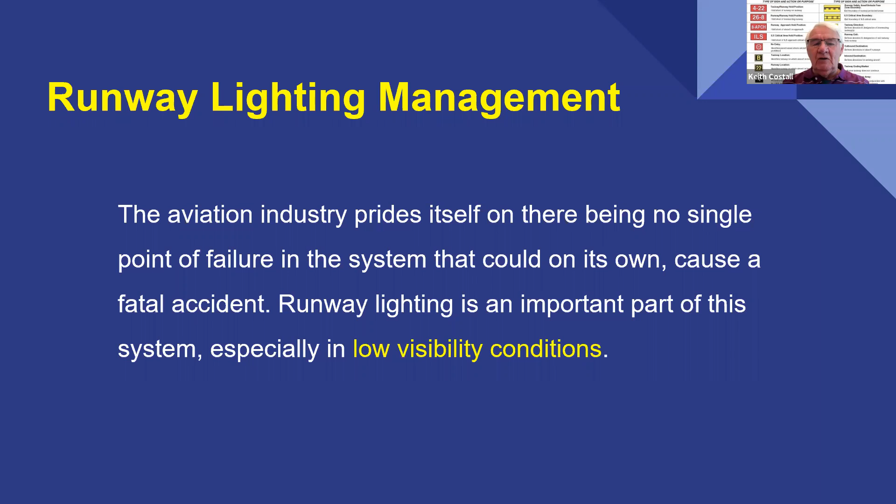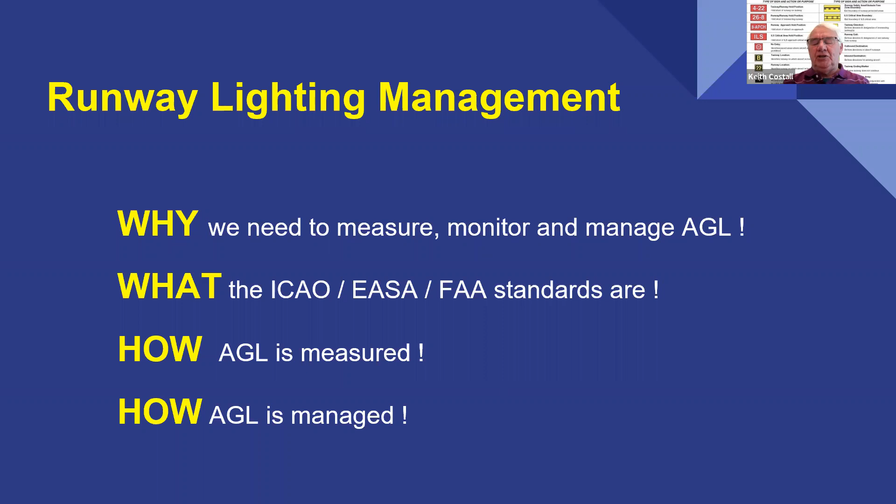So why do we need to measure, monitor and manage our airfield ground lighting? What does ICAO say? What does EASA say? Because we're physically in the geographical area of Europe, so EASA is the European Aviation authority, and we also take due consideration of the FAA, the American Federal Aviation Administration standards. So what are they? And how do we measure AGL in terms of demonstrating compliance?

And why do we measure in terms of compliance? We really do need to have a very clear and accurate understanding of the runway visual range. Now, you need to understand what runway visual range means. It doesn't mean how far can we see the terminal over the horizon or anything else. It's when the aircraft is on the runway, how far can we see the visual aids down the runway? That is runway visual range.

And there is equipment to measure that alongside the runway. Therefore, the decision to go to low visibility procedures, for example, is based upon RVR. And we in AGL provide the visual aids, the illuminated visual aids, to support that, so that we need clear and accurate information for safe operations.

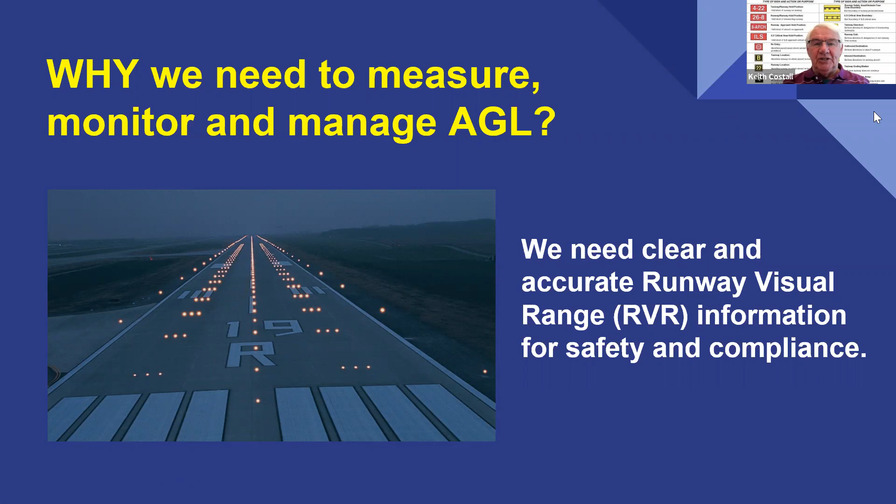Now, this is a little video which explains and shows, and here we see an approach.

The approach being a Calvert approach system. We've now getting close to the threshold, but when the low visibility, when the mist comes in, they seem to disappear. And then suddenly, we see, oh, we're at the runway. We've passed the threshold, and now we've gone through the lower than the mist level, and we're now down at the runway, and the lights will appear again.

And when we're talking about those lights, those standards associated with that light output is mandatory on us, according to the isocandela diagrams in the standards. So that's just a very brief clip of arriving, because what happens, especially in the mornings, in many airports, we get the haze, the morning mist.

Therefore, when we're above that mist, the pilot can see quite readily into the distance. But of course, the pilot has to come down through the mist to land on a runway. And so that band of mist means that the lighting, the runway itself, and hence the lighting, will slowly disappear from view and then arrive again.

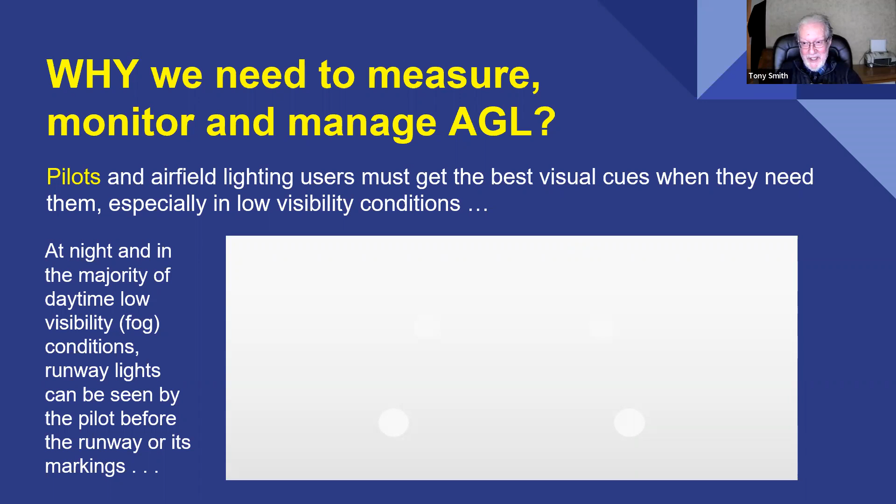He interpreted that as the fact that the nose of the aircraft was pitching up, and so he pushed and flew into the ground. Fortunately, there were no fatalities, except some horses that they got on board that died in the subsequent accident. But it was a wake-up call that we needed to look a bit more closely into the lighting design.

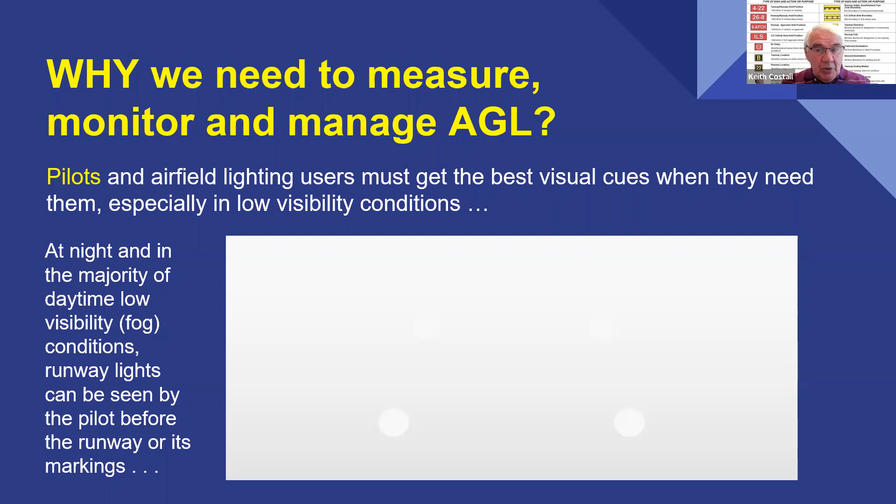So we've now moved on to this slide, and it's just like you might see a white area in the center, and the two little dots. The reality is, in low visibility conditions, that is what a pilot sees when looking for the lights which have disappeared into the fog. It's very, very difficult, because if we're coming into an approach, the approach lights are white. It is only when we get to the last 300 meters of the approach prior to the threshold that we have different colors - the red if you're in category 2 and 3 of the supplementary approach lights, and then the green of the threshold lights. It's just a little explanation to say it's not always as straight and clear, especially in lower visibility conditions.

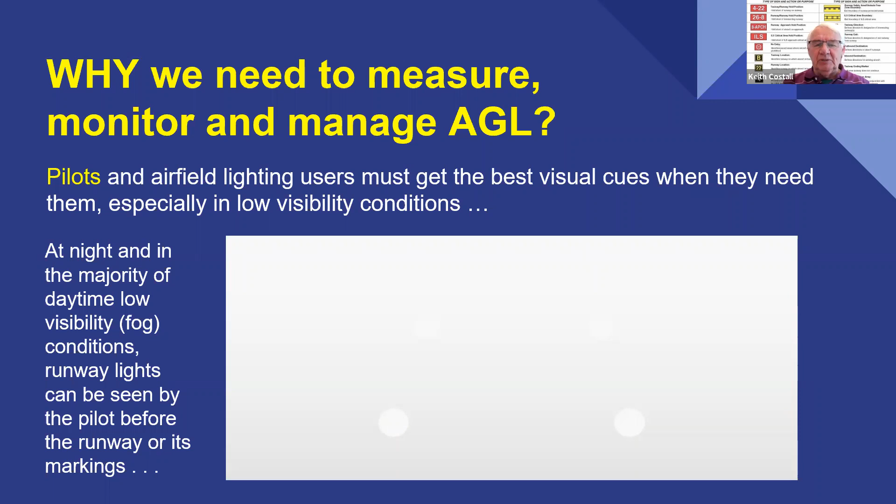So why do we need to measure and monitor AGL and manage AGL? Well, the reality is the airport operator, the aerodrome operator, has a legal responsibility to ensure that all facilities are acceptable and compliant for safe aircraft operations. And therefore, from a commercial viewpoint, in addition to the legal viewpoint, obviously they want to maximize the capability - more aircraft landing, more aircraft taking off, more passengers. It means money at the end of the day. So it's both a commercial advantage and a legal responsibility to do so. Airlines similarly want to minimize delays, diversions, etc.

And we all know what happens when an aircraft gets diverted for any reason - the aircraft's in the wrong place, the passengers have to be relocated potentially by other means, and then the pilots and aircrew are out of flying hours, etc. So there's a lot of issues associated if we do not have a compliant system, whatever the system is - but obviously we're talking about airfield ground lighting, or aeronautical ground lighting, which is the correct formal name for AGL. And of course, regulators and airport authorities are licensing aerodromes, and we have to ensure our systems meet those licensing requirements in accordance with the regulations. So that is why.

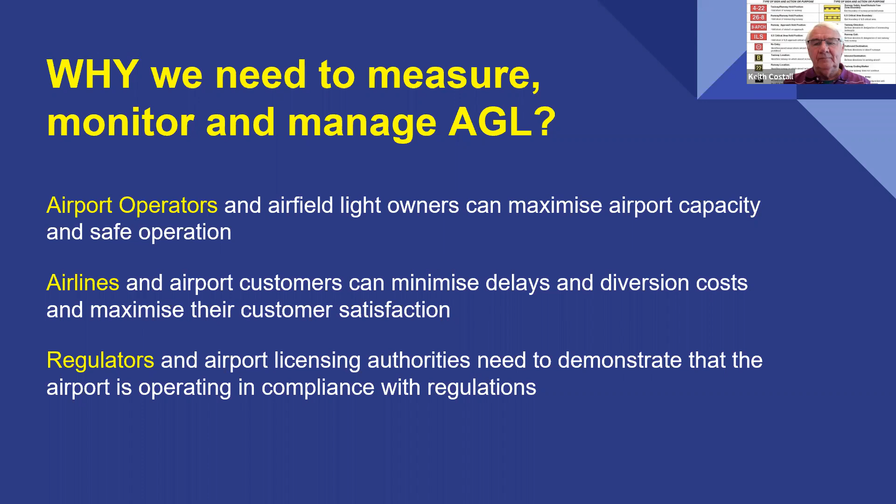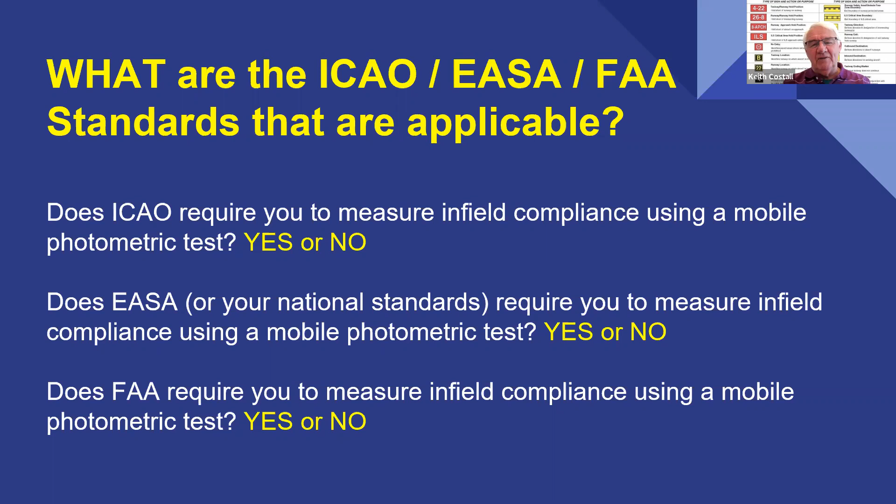So what are the standards? Well, I've mentioned ICAO, EASA, in previous webinars, and the FAA in previous webinars. And what are those standards? Do ICAO, EASA, the FAA, or your regional or national standards, like CASA in Australia, actually require you to measure the AGL for compliance? Answer it for yourself - do you think where you are in the world, you have to demonstrate compliance, and if so, how do you do it? Remember, one of the statements we've made in the past - you cannot manage what you do not measure. So if you're demonstrating compliance, you will need to measure the light output in the installed situation in the field. So ask yourselves these questions: are you required to measure in-field compliance using a photometric test? Next slide please, Robert - we'll talk about that a little later.

So what are those standards? Well, clearly the international standard in ICAO is Annex 14, and it's the latest edition - currently edition 8, including the latest amendments. Bear in mind that periodically the editions are released. So we're currently in Annex 14, Volume 1, which is the aerodromes. There is a Volume 2 for heliports, but we are dealing with aerodromes. So it's currently at edition 8. You need to ensure - you have to buy this document from ICAO, it's a purchased document.

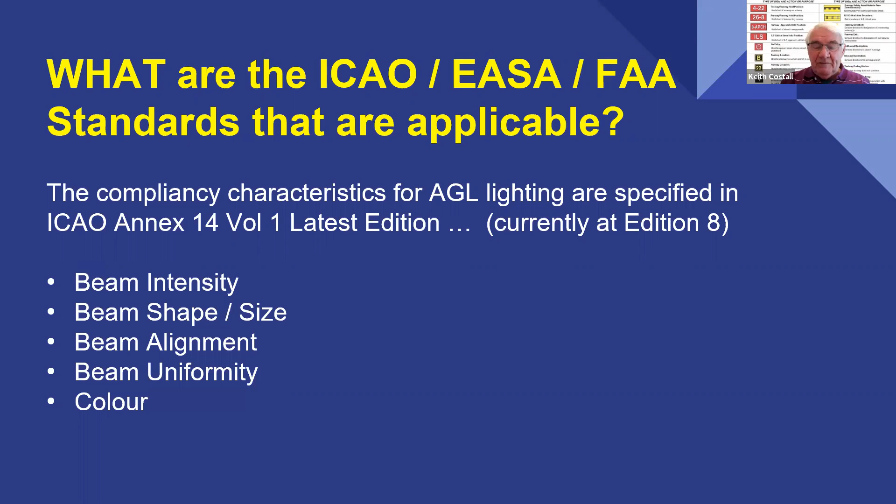But what we're looking at in AGL is beam intensity - the shape and the size of the beam, the alignment of the beam, which direction it's pointing at, and the uniformity associated with that beam, and of course the color of the lights themselves. So we use different colors for different functions, and when we're looking at that intensity and those standards, in Annex 14 there are a set of iso-candela diagrams. Interestingly, some of them look circular and some of them look rectangular, and I often get asked - well, why is that?

Well, the reality is, from our perspective, from a maintenance engineering, operational maintenance engineering perspective, it really does give us an indication of which are runway related lights and which are taxiway related lights. So the circular looking ones are for runway related lights, and the rectangular looking ones are for taxiway related lights.

And it gives us a pretty quick glance, but of course there is a set of requirements in the iso-candela diagram, which shows us the intensity in terms of the minimum average intensity. And from an in-field viewpoint, we're only interested in the inner ellipse, only for operations in the field.

And also under the isocandela diagrams, there's always a set of notes, and also a set of collective notes at the end of each appendix. When we're looking at the notes, if there is to be a toe-in, an angular, horizontal angular direction - for example, touchdown zone lights are toed in towards the center line of the runway - that toe-in will be in the notes. It's not shown in the iso-candela diagram itself; if there is a toe-in, it will be in the notes. Just to be sure that you understand that.

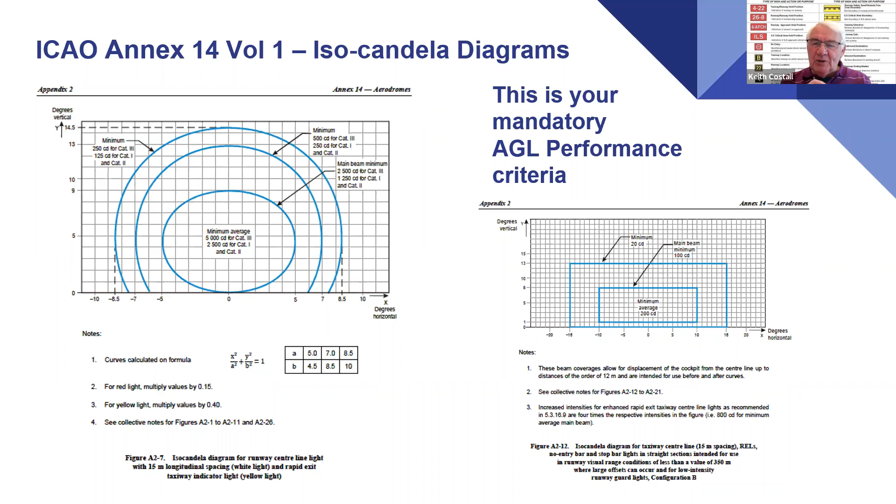Now, iso-candela diagrams is the standard that we refer to when we do photometric compliance testing. And we've got a nice little explanation here. We mentioned earlier when we were looking at a little video, and we look at when light output can disappear.

Because of runway visual range considerations in terms of fog, etc. But when we look at an individual light, we say what actually causes this? Well, one of the main things is like rubber deposits in that touchdown zone area, as an example, dirt. If you look at the inner ellipse which I'm showing here, there's a lot of crossover points, and those crossover points are 1 degree crossover points.

And we've got to maintain a mean average across all those crossover points. So how we measure is that you measure the light intensity at each crossover point, add them all up, and then divide by the number of crossover points to give us the mean average. And if we lose, for example, 1 degree at the bottom of an ellipse, and if we look here, you will see that you can count - 1, 2, 3, 4, 5, 6, 7, 8 - and if we look at all of them, there's 52.

Now, if we lose 8 measurement points because it's dirty, out of 52, we are losing quite a dramatic percentage of light output. And if we lose 2 degrees at the bottom and we lose 17 points, we are now in an area where we've got a serious problem. So how can you measure for that? The human eye will say, oh, that light looks a little bit dimmer than that light alongside it, but you can only quantify it by doing a measurement.

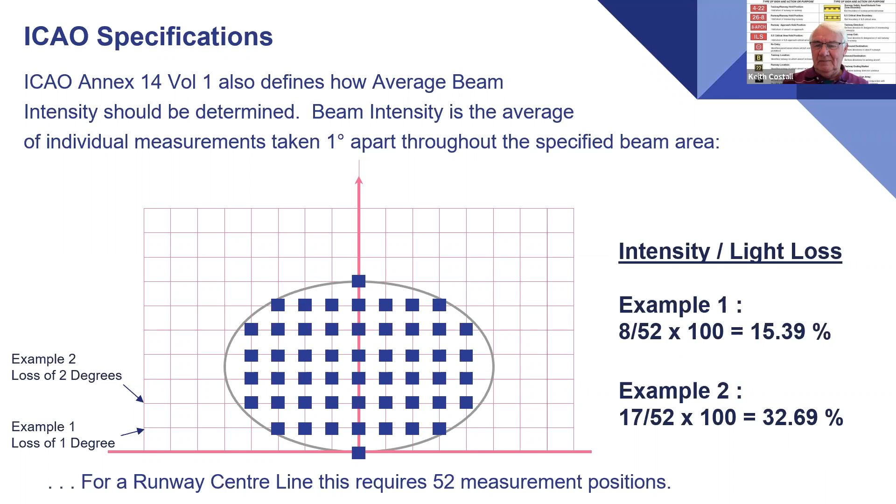And this is a good example. So what we do is, when we're looking at all our different systems, we measure light intensity by using a percentage. And we always say that at step 5 - internationally, and some nations have more than 5 steps - when it's at maximum intensity, that is 6.6 amps electrically feeding the light fixture, we call that 100%.

So the iso-candela diagram is based on 100%. So 100% of an approach light, which is deemed to give us 20,000 candela, is 100%. 100% of a runway edge light, which is deemed to give us 10,000 candela, is 100%. So we base everything around the 100%.

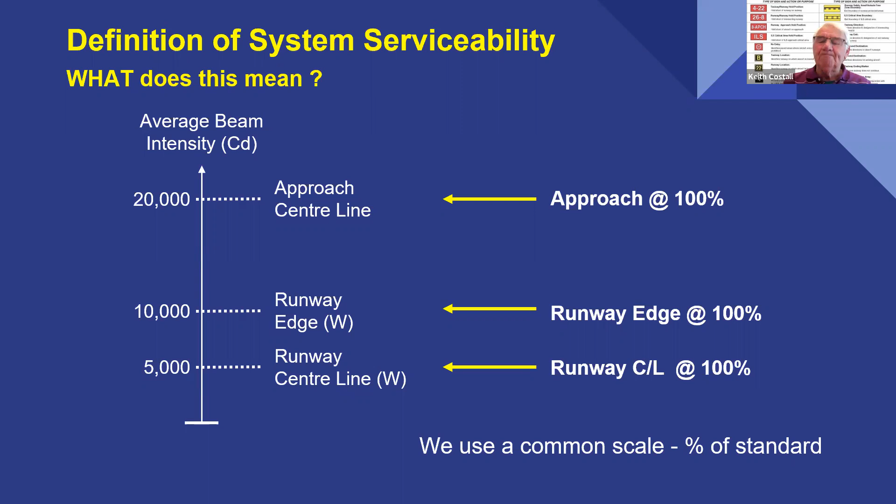And therefore, this is a nice little slide which explains where we go into the serviceable and then down into the unserviceable range. ICAO defines that in Annex 14 and the supporting documents. Then when the light intensity of an individual light drops to 50% of the design criteria - and the design criteria we know is the iso-candela diagram at 100% - so when it falls to 50% of 100%, then it is deemed to be unserviceable as an individual light fixture.

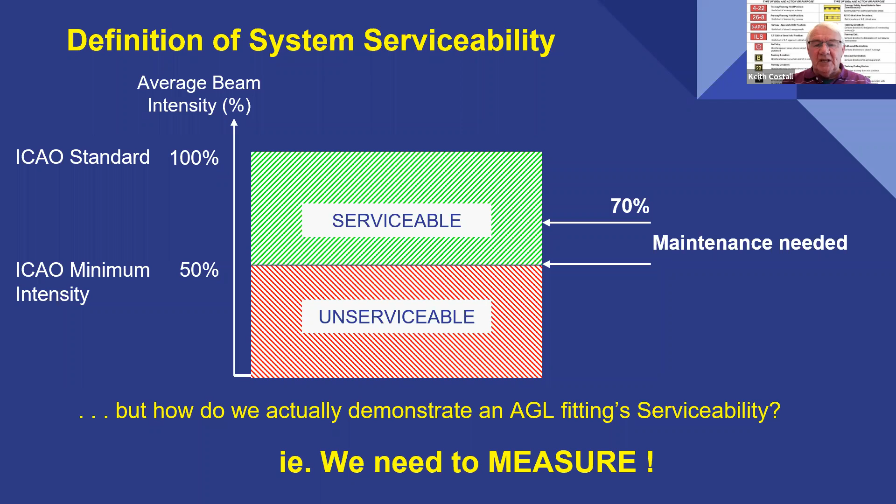And the guidance in the service manuals, the ICAO service manuals, gives us maintenance guidelines. They give us guidance to say that when the light output falls from 100%, which is the design criteria, to 70%, that light then should be deemed to need maintenance. Now you can decide that, but the guidance from ICAO says 70%. There are some national authorities which have a slightly different percentage for that maintenance, but you need to decide that. So there's the guidance. Let us now go on to the next slide, Robert.

So what are those standards, and do you use photometric? Now I asked that question earlier, a little earlier.

Well, the answer is in all aspects, it's a yes in ICAO, it's a yes in EASA or your national standard, and it's a yes for the FAA.

Most specifically, I'll bring to your attention that in ICAO, during the pandemic, they reissued a document, 9981. The ICAO document 9981 actually defines the criteria associated with safety and compliance.

But when we're looking at EASA, in 2021, during the pandemic, they issued the guidance on certification specifications. That document was released around June 2021 during the pandemic. So again, there is a yes for EASA.

And when we come into the FAA, for those airports under FAA guidance anywhere in the world, if you're operating under FAA regulations, then for airports funded under Part 139, their 139 criteria makes it mandatory to do a photometric test. So in all three aspects, it's a yes and a yes and a yes.

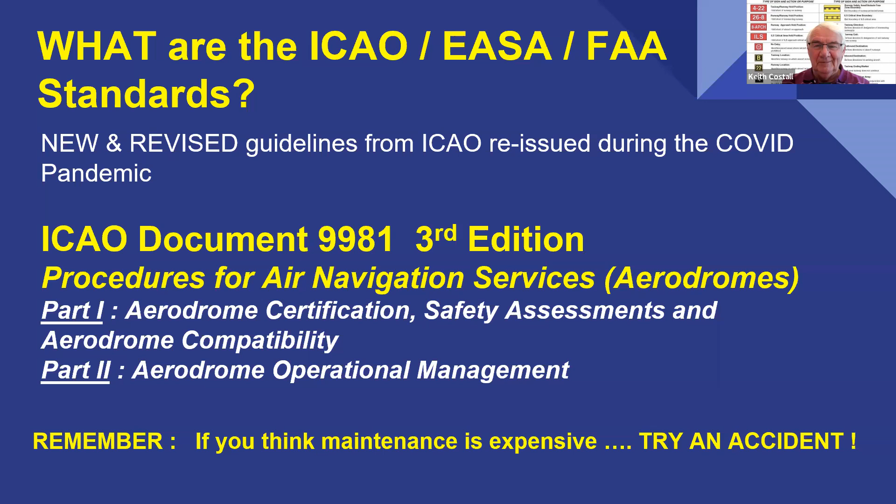So how do we measure it? Well, the regulations are pretty clear, and now 9981 reinforces that. The third edition reinforces that, and I've extracted just two little statements about the visual aids lights. Out of 9981, it says lights shall have the required colors and intensity levels, and they shall comply with their serviceability levels or the maintenance objectives.

We know what those colors and intensity levels are, but you've got to measure it. Do they comply with the serviceability levels and maintenance objectives? You've got to measure it and take suitable records.

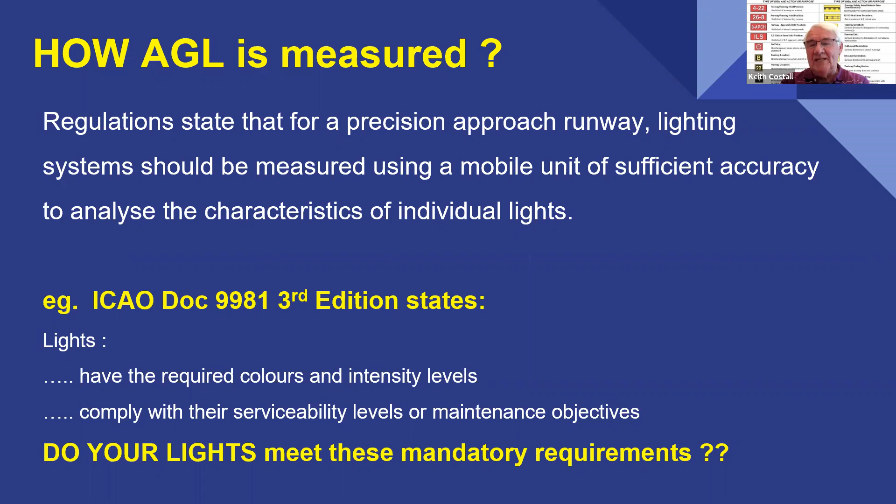So I'm saying to you guys out there, do your lights meet these mandatory requirements? And can you demonstrate it to the regulator? Would you be willing to go into a court of law in the event of an incident or accident, where there's a legal investigation, and say yes, my lights meet the standards, and I can demonstrate it using the tools that are available?

And what tools are available? There are tools. Photometric testing. There's photometric testing in the field, and there's photometric testing in the workshop capability.

You can demonstrate it. Here is an example from the aerodrome design manual, part 4, on visual aids, chapter 17, with a nice picture of a typical photometric measuring tool. It just happens to be MARMS. Why MARMS? Because it's accurate, reliable, repeatable, easy to use, and quick to use. So it meets the needs of maintenance teams.

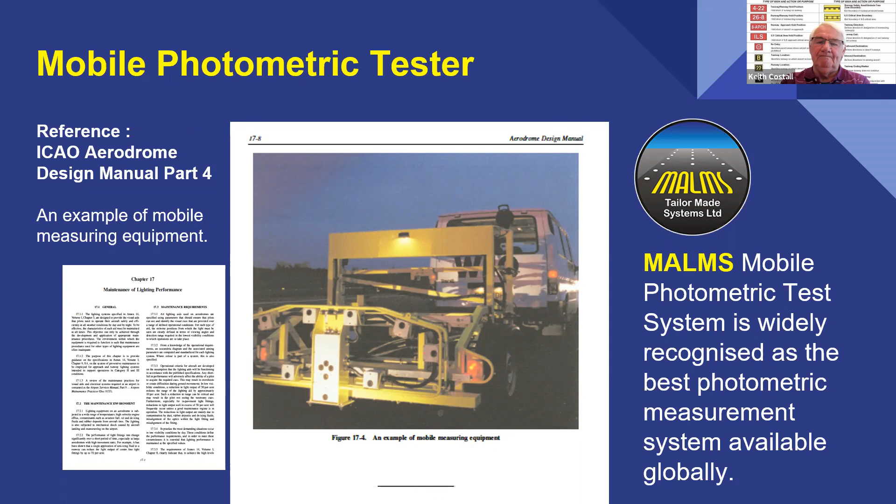And how do we demonstrate? Well, remember, we talked about 100%, we talked about 70% for maintenance, and we talked about 50% for unserviceability of an individual light. So we use green, blue, and red in our bar chart.

In the photometric bar chart, you'll see a line. Individual lights that are above 70% are shown as green. Those with a light intensity between 50 and 70% are shown as blue. And those below that, which are unserviceable, are shown as red, with a clear 50% line.

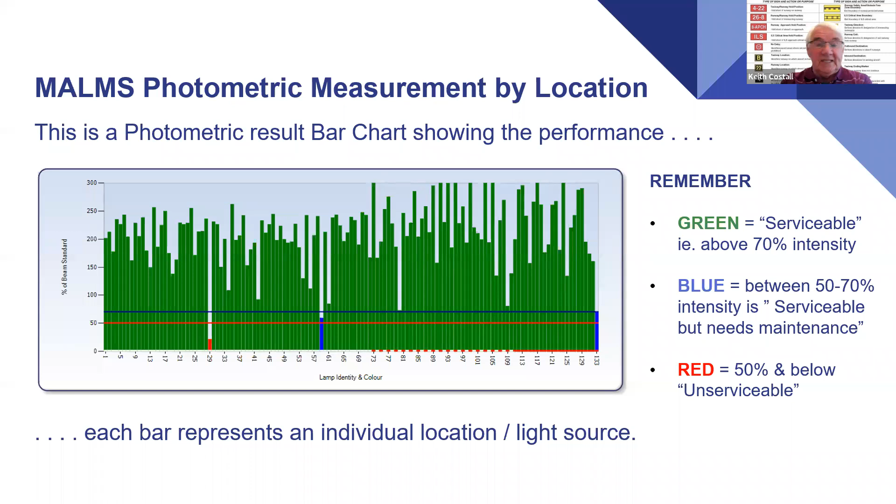I've talked so far about individual lights, but there's also the criteria for when we put all these lights together in a system, and there are guidelines from ICAO associated with system serviceability.

We still use 100% as the baseline. If we look at a Category 2 or Category 3 runway, at least 95% of the lights shall be deemed serviceable, and no two adjacent lights shall be unserviceable in a Category 2-3 operation. But for Category 1, where visibility is further, beyond 550 meters RVR, then it's 85%.

Now, when we look at individual systems, those percentages for Category 2 and 3 are slightly different, some are 90%, but generally speaking, in a maintenance team, we stick to 95% so there's no confusion. And that's our target when we're managing maintenance.

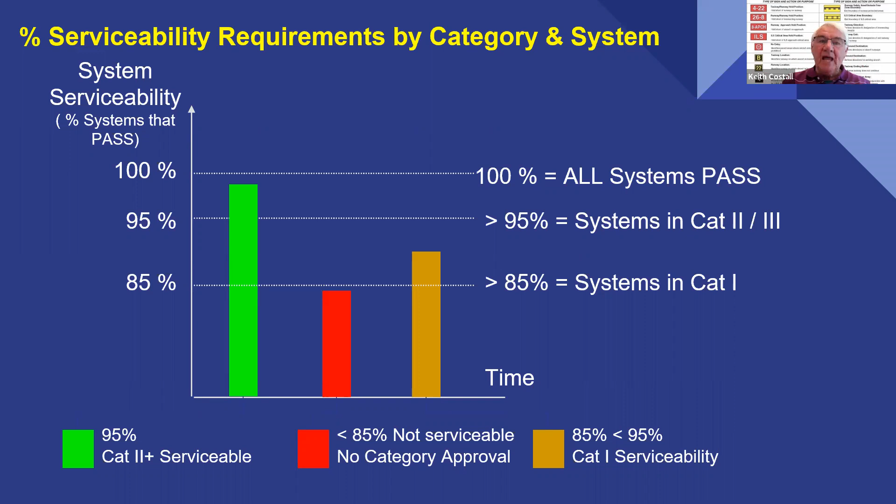So where do we start? We've got to measure the light, but how often, how frequent? That question keeps coming up because ICAO said in the guidance, at least a minimum of 2 times a year. But how can you have only 2 times a year right across the world at different intensity, traffic density levels, and different geographical and atmospheric conditions? It's impossible to have one standard. So you have to start somewhere. This slide gives a guideline of where to start when determining your periodicity of checking.

For runway edge lights, for Cat 1, let's start at a 12-week cycle. If there's a center line with a Category 1 runway - it's not mandated to have one, but if there is - then probably a 4-week cycle of photometric testing. When visibility comes down, we want to be more stringent, so for Cat 2-3 edge lights, we'd probably test every month. Then we look at the records and decide periodicity of inspection according to those records.

There are other factors too, like is it 3 aircraft a day, or 3 aircraft an hour, or 30 aircraft an hour? Traffic density has a factor. Also, how long have these light fixtures been in - are they tungsten or LED? This element also has a factor. So we just give guidelines of where to start.

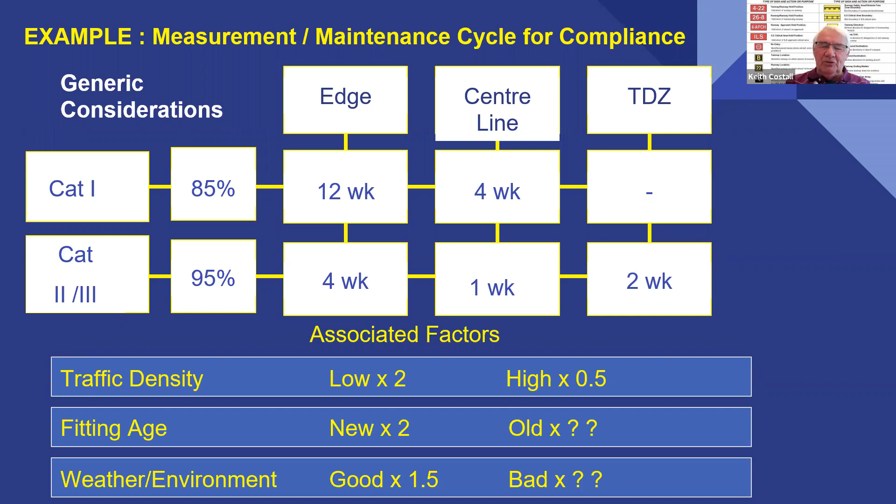So what are the factors which deteriorate light output? Electrical factors - not getting the correct current. Optical factors - is it a tungsten halogen or an LED, for example? And the fixture itself inside - is it secure?

There's the civil elements associated with where we put inset lights or in-pavement lights. We have to put them into a base unit, glued into the pavement, straight and level. But what if the pavement moves because of rutting? If you go on a highway, a 2 or 3 lane highway, the inner lane is always a little less smooth than the outer lanes - because the heavy vehicles, the lorries, go on the inner lane, and eventually you get the track called rutting. We have the same concept on a runway pavement, especially in touchdown zone areas or on rapid exits, for example. So we get civil elements.

We also get mechanical elements - is the light fixture fixed down securely into the base unit, etc. These are factors which affect performance. Now, interestingly, when you do a photometric test using a MALMS system, there is some indication in the way the results are presented which can give you an indication of which factors are affecting the light output. That's an important aspect to remember - it gives you some indications, you still have to understand it, but it gives indications.

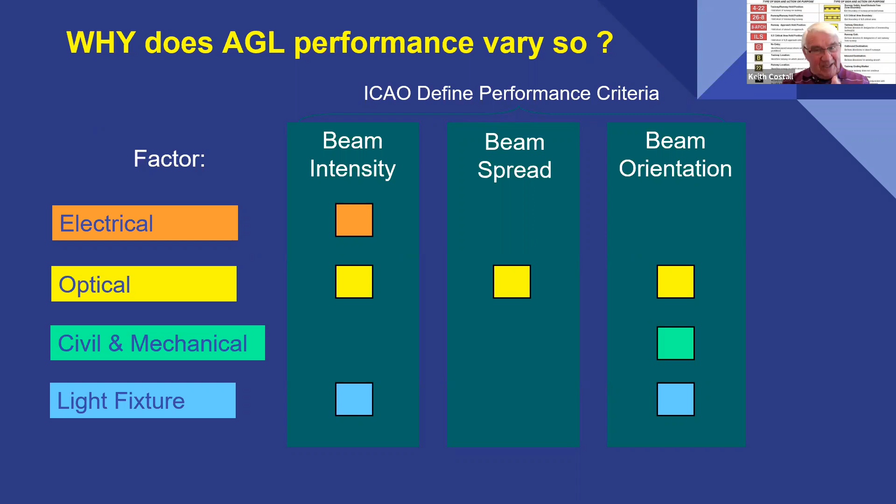So how do we manage it? Well, we manage it in accordance with the standards, using a photometric test, taking the records, looking at the records, etc.

So let's not forget, there are civil elements to be considered, mechanical elements, and electrical elements to be considered if we do not get the correct photometric output. Today we're talking about photometrics - we're not talking about the civil, mechanical, and electrical side. But if anyone wants training or a webinar on these subjects, then we can do so.

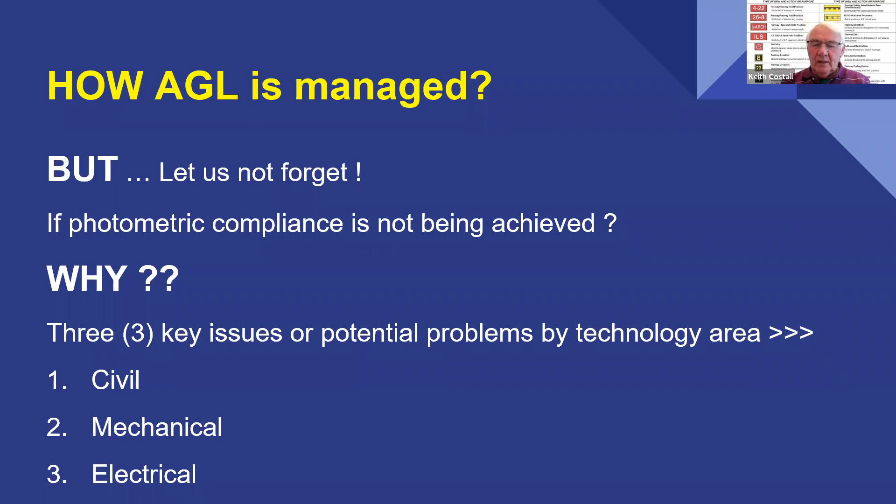I think it's my turn now, Keith. I think now we actually get into the nitty-gritty of management of the assets. You've left me one minute to do my slides.

Thank you, Keith. So we're talking about management of airside assets, asset management. Key to asset management of your AGL is good installation, as Keith said earlier - electrical installation, optical installation, civil, mechanical, and of course the light fixture itself. If it's not serviceable, if it's not compliant to start off with, you can't maintain it to a serviceable level. So it's vital that as part of any new installation, either a refurbishment or a new runway altogether, that you get measurements taken, compliance, photometric testing, basically, to ensure the system you have acquired, purchased, or installed is compliant to start off with.

If you have that, which you should have, you then need the spare parts and tools, including measurement equipment and an asset management system. You're measuring, there are airports with tens of thousands of assets out there. You can't measure them on bits of paper, you can't manage them on bits of paper.

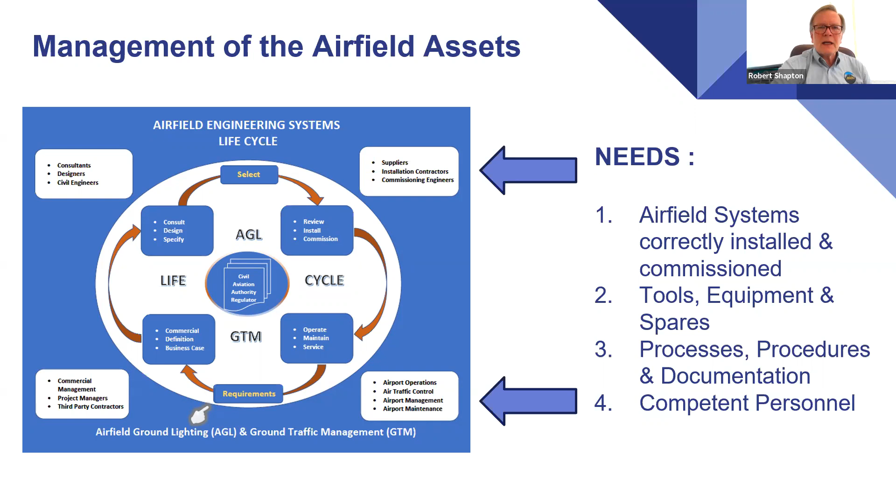You need an asset management tool to manage those assets properly and efficiently, to achieve compliance and efficient operation. You need good processes and procedures—without them, you can't manage your assets either. But the vital bit that glues it all together is you: competent, well-trained personnel. You need the tools and good processes, but at the end of the day, it's people that matter when it comes to achieving and managing these systems.

An example of that would be MALMS engineer system and dashboard. All assets have the same characteristics: they have to be purchased and installed, commissioned, managed and maintained, and at the end of life, decommissioned and replaced.

AGL, however, have to be compliant at all times. It's not one day of the year when civil aviation come—it's at all times, because when called upon, particularly in times of low visibility, those assets have to work to achieve the benefits we saw earlier, and fundamentally make sure pilots have the visual cues they need to land safely and take off safely.

The costs—it's also vital that the cost of managing your AGL throughout their life should be minimized. Cost is unfortunately something we have to consider at all times, and I think we all suffer with it, because particularly with COVID there have been a lot of cutbacks, making our lives increasingly difficult because a lot of knowledge and experience has been lost to our airports.

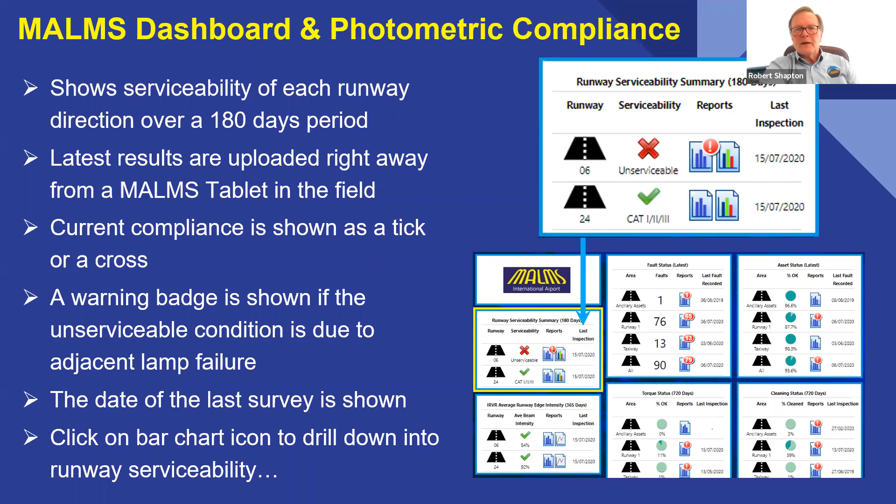The dashboard shows high-level measurements, the entry-level dashboard, which you can configure yourself when using the system. It shows the four measurements of the key areas, including runway serviceability. A cross or exclamation mark indicates action is required or overdue. A user can drill down to each individual AGL for analysis and action by runway, looking through to service, the centerline, TDZ, edge, threshold or end, and then to individual bar charts representing lights, to an isocandela for that particular light or fixture.

Here's an example of a bar chart. Each bar represents an individual light fixture. The black ones are blanking plates. A green bar is serviceable, and blue represents a light requiring maintenance.

As Keith said, according to ICAO, once a light goes below 70% of its required output, it should be identified and maintenance carried out. It should never reach red, because that is unserviceable—effectively not working. You can see there are some red lights on this bar chart. As you know, the rule of thumb would be 95% for Cat 2/3 and 85% for Cat 1 acceptable. But in this case, you can see there is adjacent lamp failure.

So we have two lights that are unserviceable next to each other. This means the pattern, as the pilot would see it, of the runway lights—bearing in mind he won't see very far in low visibility conditions—the pattern is destroyed, and therefore the runway lighting system is deemed unserviceable.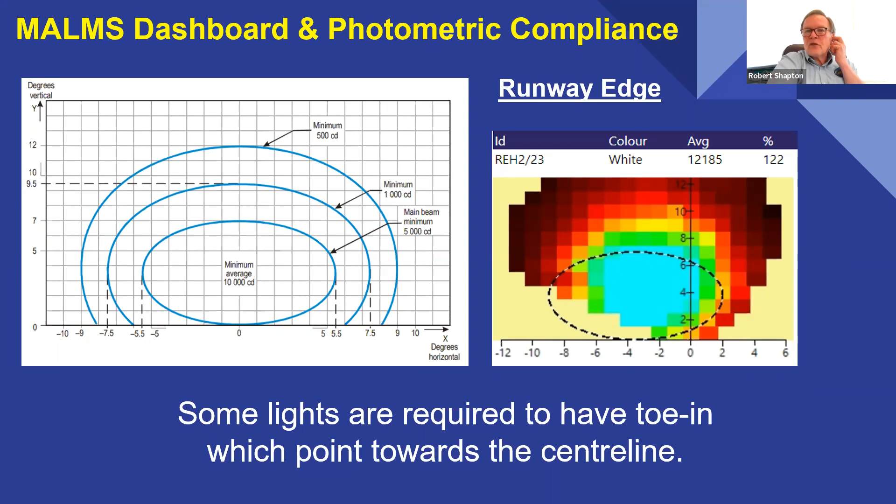This is an example of a report that shows a measurement. The top two lights here are showing each side. This is the light that's just been measured, with the other side of the light here. One side is unserviceable at 49%, the other side of that light is 71%.

Typically, this would represent... this would look to me, if you look at the previous measurement. This measurement was taken on the 16th of July, previous measurement 14th of April. You can see this light appears to have deteriorated over that time. It could just be dirt accumulating, or more likely on a halogen installation, the filament of the lamp is deteriorating and that lamp needs replacing.

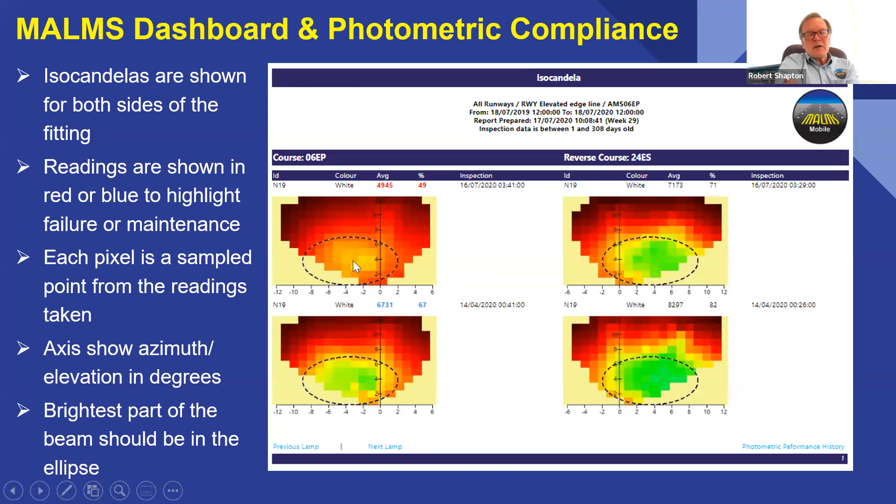On the other side of the light though, the performance is also deteriorating, but it's not as bad. Typically it will be a combination of dirt, particularly you will get one side of the lamp, in the prevailing wind direction or takeoff direction, which will suffer more damage to the lens than the other. So you will often see one side of the light better than the other.

Touchdown zone lights are an example of lights, like the runway edge lights, that need to be toed in. You will see they're unidirectional lights. These can either be a straight fitting in a toed can, or a toed fitting in a straight can. We often see issues where toed fittings are used and put in on the wrong side of the runway. This is easily identified on a MALMS course bar chart because the ellipse will not be at the same place as the brightest part of the beam.

Here's an example of a course bar chart where you can see the beam is in a significantly different place from the ellipse. On the top diagram, you can see the beam is probably a little higher than it should be, but it is pointing centrally. On the bottom isocandela, you can see the beam is high and to the left-hand side. This is, by the way, viewed looking from the inside of the light, looking out.

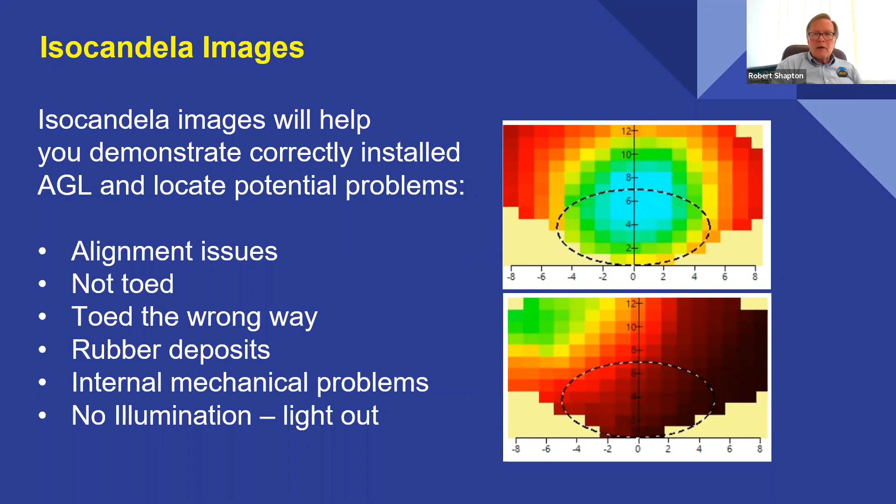Reasons for problems you will identify from an isocandela diagram include alignment issues, such as this - the fixture is not toed where it should be, it could be toed the wrong way completely. You will see rubber deposits reflected by dark patches on the beam. There could also be problems in the internal mechanism when the lights are put together, where the internal lamp components are assembled incorrectly. There are even cases where the light is completely out, where the isocandela diagram comes out black.

This is another example of reports to assist people maintaining the runway, where you get the course bar chart, and this report shows the map of the light. You can see the third light from the end is completely unserviceable - well, it's on both sides actually, but this course bar chart represents one side. You can see on the map which end of the runway to go to, to avoid any confusion.

Now, I know in the past I've seen maintenance taking place on the wrong light. It's important the reports clearly identify where you are. You can of course use, with our system, the tablet to give you directions to an individual fault. But if you're going to go out on the runway without a tablet, you can use paper reports such as this.

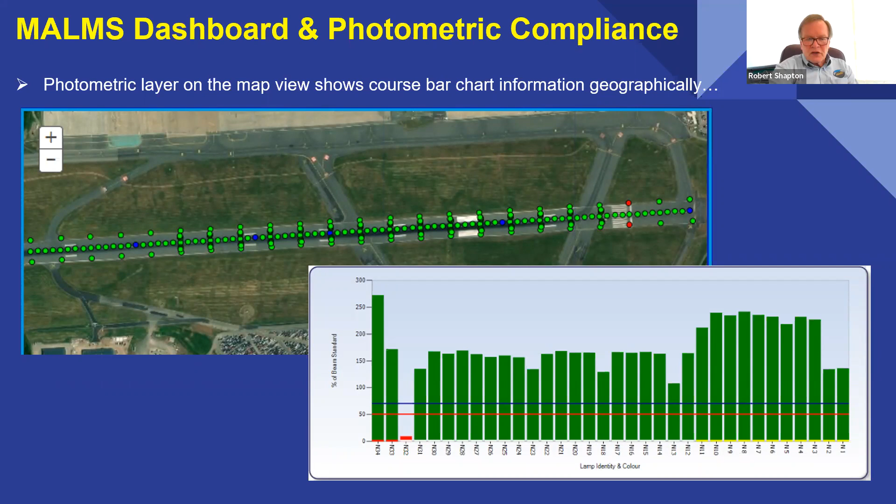Then we come to the runway service, the runway measurement charts. This one shows the number of assets that are at fault or unserviceable in an area, and the number of faults in an area. You can get more than one fault per asset - for example, you could have a photometric fault and a torque fault, so that accounts for the difference.

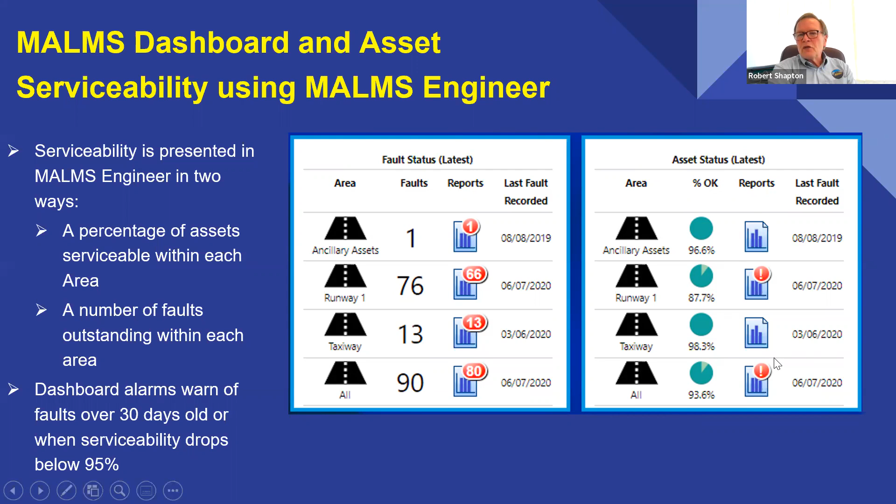You can also, in a modern asset management system, set a time limit for fixing faults, so that you will know if those faults are actually being fixed in the service level time specified for it. If they're not, you will get a shriek mark here to indicate there's a problem, and if you click on that, it will take you through to the detail of the individual asset, where you can see what the problem is.

MALMS can also be used to identify all the current faults on the airfield from various sources - not just the photometric faults we've been looking at earlier, but also faults imported from the control system, from visual inspections. They can all be reported onto the airfield. Also for other assets, you can see the PAPIs marked on there. You can even, using a modern asset management system, mark out the civils layers.

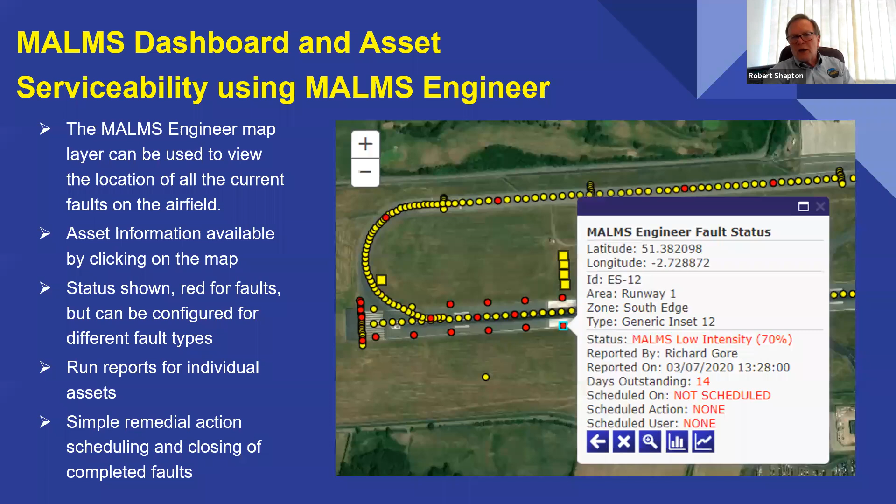But if you click on any one of those faults, you will get a fault status report showing you, for the asset, what the problem is. You can then click on one of those reports at the bottom to get the bar chart, the history, the isocandela reports, and any other information you need to identify fixes for that problem, for that light.

And then finally, there's the asset hotspot report, where you can select over a period of time the faults for an area, and you can see according to how red the light is, the red indicator, to show you where there have been multiple faults and how many. So in this particular instance, you can see on the center line here, where, as you might expect, by where the rapid exit is, there have been more reports on these lights than the lights after the rapid exit area. The redness will indicate the number of faults there, and you can click on them to identify the relevant information to assist with your asset maintenance.

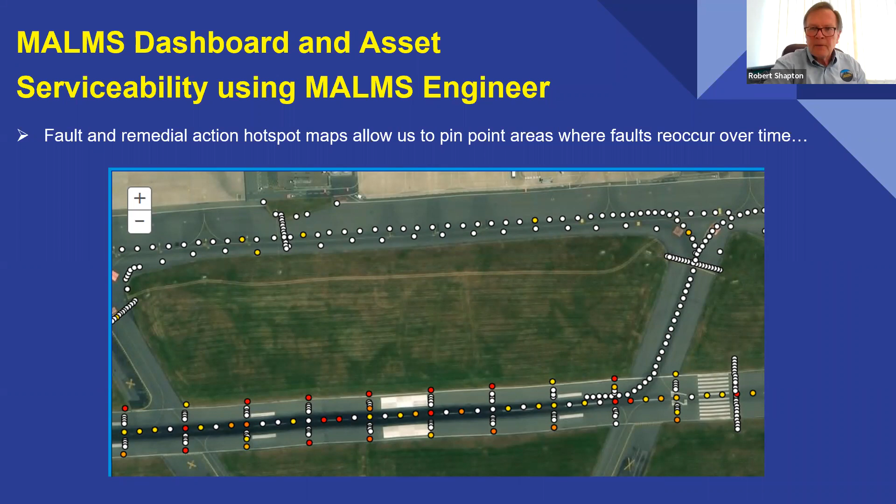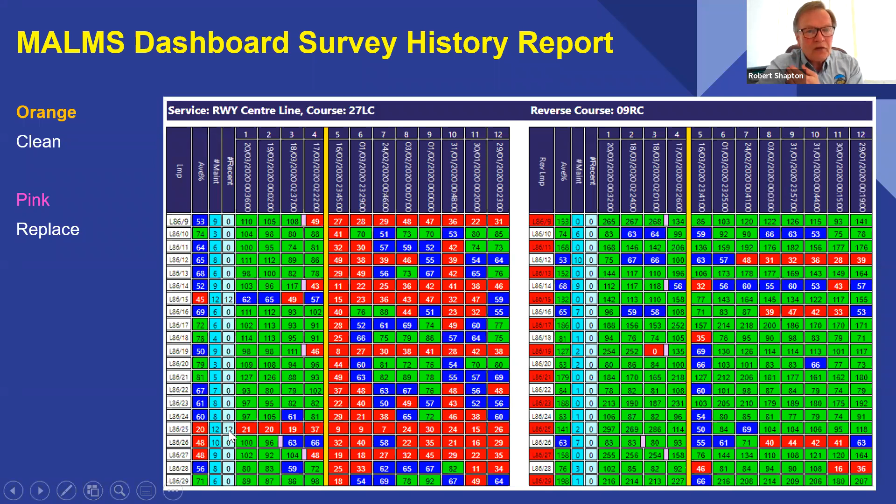And then we come on to the maintenance philosophy that we employ in TMS, and that's the MALMS differential maintenance. It's based on measurements and standards. You first of all measure to collect accurate, reliable and timely performance data.

You'd use a MALMS photometric system, photo bench, to test in the workshop to make sure you don't put any bad lights on your runway. You would have a MALMS sign and Papi tester for your signs and your Papis, and a MALMS apron and stand tester for your apron and stand lighting measurement, and of course the asset management tool to record and hold all those results and present it in the dashboard.

You then perform maintenance based on the measurements you've taken, the work being scheduled and targeted when, where and what as required. If it isn't broken, you don't fix it. Runway access is at a premium, as we all know, so that's absolutely core to our philosophy. And you use tools such as the MALMS airfield torque wrench, MALMS cleaner, a MALMS rapid serviceability tool, and MALMS engineer again to schedule and manage your maintenance and to conduct your planned preventative maintenance actions.

And then finally, you monitor the results of those and the effectiveness of your maintenance work using the MALMS dashboard. You measure and check your airfield lighting serviceability for compliance, your torque status, make sure everything has been torqued at the required service interval. You would look at your insulation resistance statistics to make sure you don't have any circuit issues and use the tools if required to address those issues.

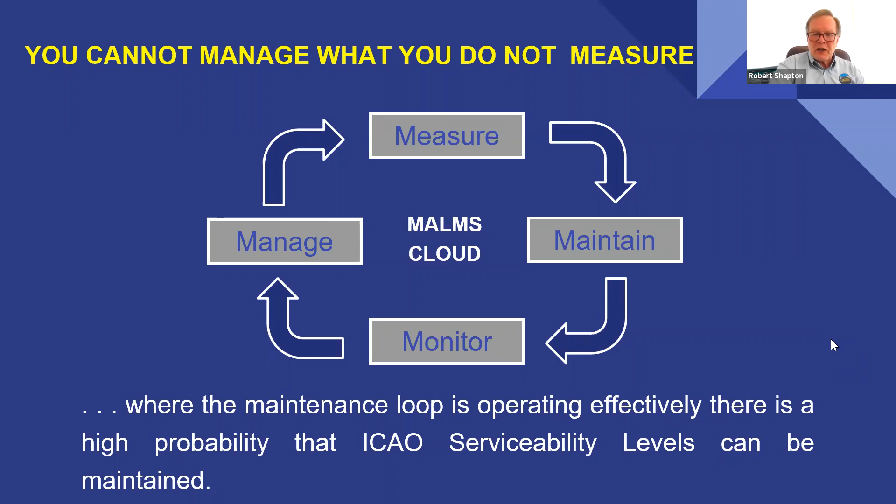You can't manage what you don't measure. The whole point of this is to benefit the airfield.

Counting down in order of benefits: the sixth best benefit is that it enables your airport to demonstrate to its stakeholders - everyone who works at the airport, the airlines, the regulators, government, the owners of the airport - that the airport is operating safely, and they're gaining operational advantage as a direct result of the work you're doing.

It reduces the number of occasions where pilots complain of glare, because they're having to increase the intensity of the lights unnecessarily to overcome a number of dirty or faulty lights.

One of the key benefits nowadays is reducing CO2 emissions, because by improving your IRVR results, you're able to delay going into low visibility procedures and accelerate coming out of low visibility procedures, meaning less aircraft holding unnecessarily - a huge benefit for your airport and for the environment.

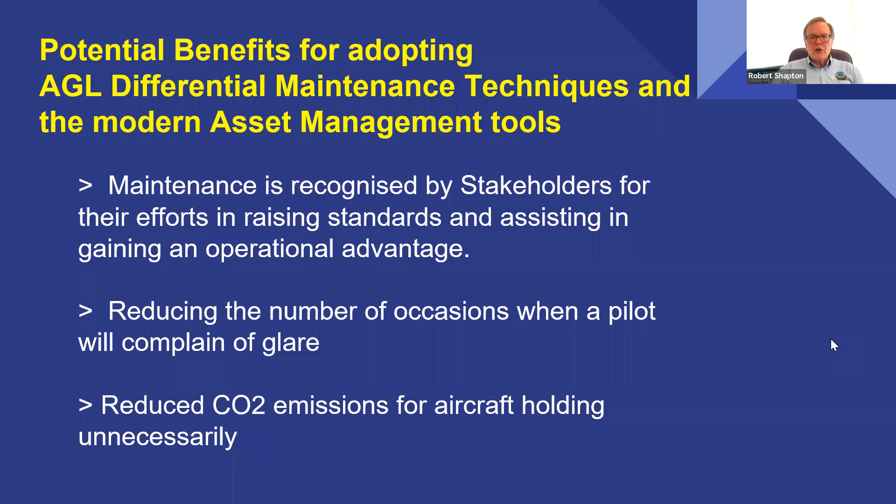You'll be able to increase capacity as a result, because of this delayed onset of low visibility periods and accelerated coming out of low visibility periods.

The chances of a successful landing, avoiding go-arounds and potentially diversions, is of course increased as a result of your improved maintenance and fewer unscheduled maintenance interventions. That's a huge benefit for the airport and the airlines.

And of course, ultimately, the number one benefit is improved airport safety. Pilots approaching in reduced visibility will be receiving the visual cues they need to land and take off safely, and they will get accurate runway visual range readings - not overstated because the lights aren't working as well as they should be.

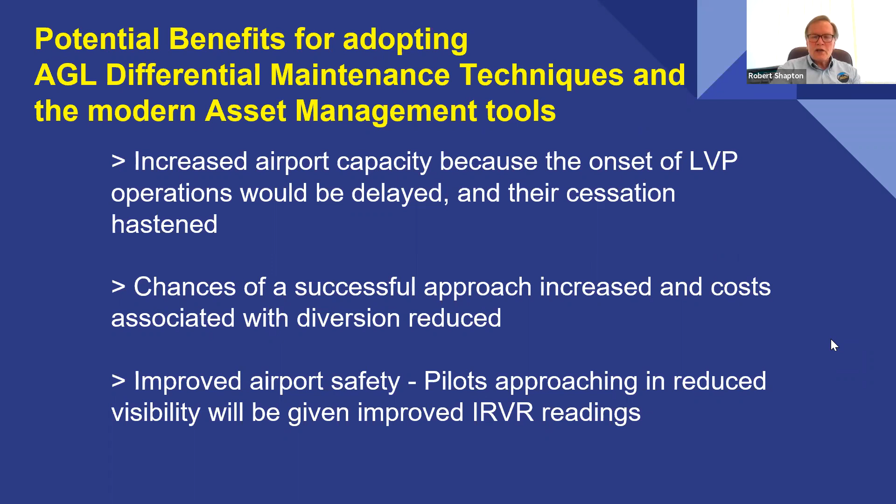In an actual case study we did for a major international airport, we calculated that for each low visibility day, 37 minutes were gained by virtue of improved RVR data, which translated into 24 additional landings and 24 additional takeoffs per low visibility period - a huge benefit.

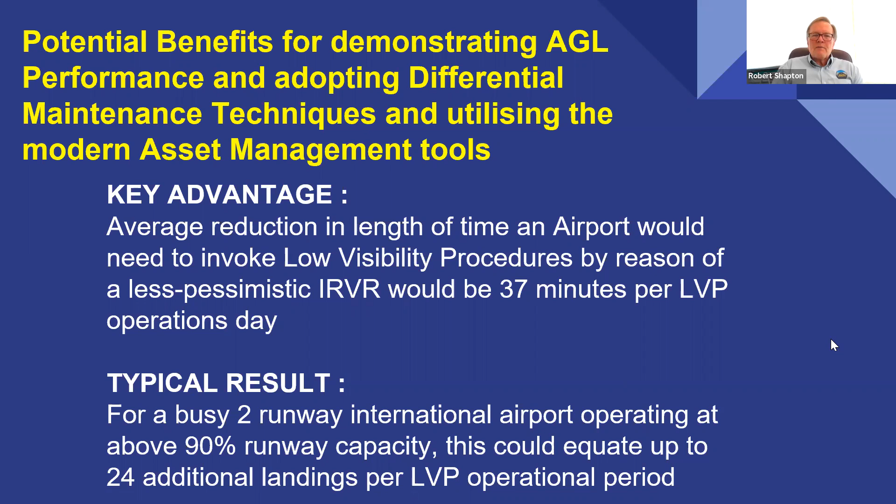This is so important, for safety but also for the benefit of the airport. That's why we have to do our work and manage our AGL and compliance as efficiently as possible.

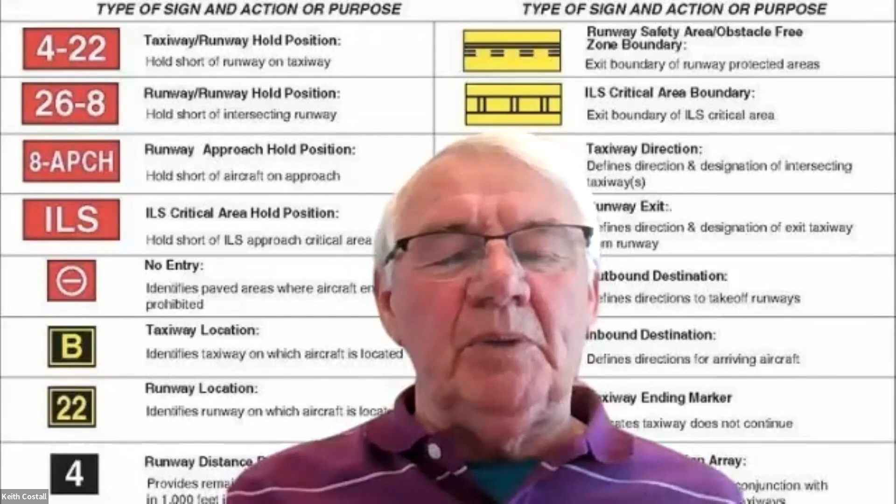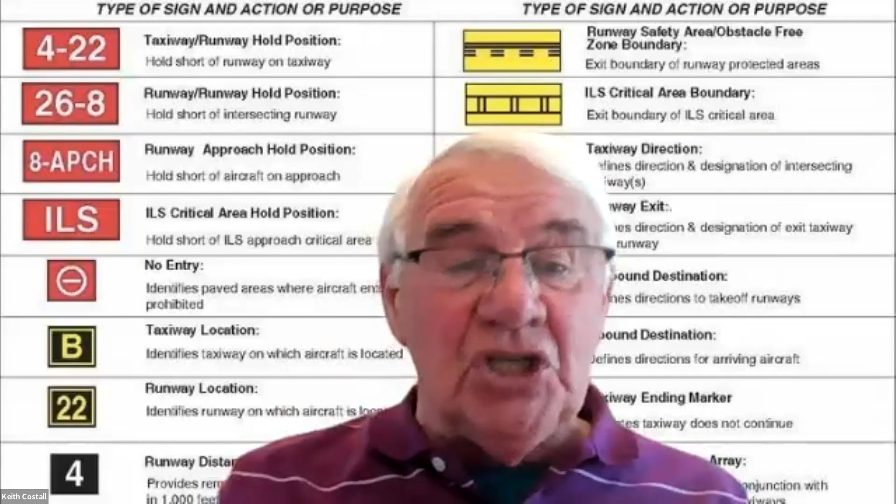I mean, the answer is no, but I would repeat the fact that your photometric measurement system needs to be reliable, it needs to be accurate, it needs to be repeatable. So when you do one run and then do another run, you do get the same results. It needs to be easy to use, it needs to be robust, it needs to be quick to use. There's a lot of factors, and not all the systems available meet all this criteria.

And also, is the recording automatic into an asset management system? Yeah. And also, all the parameters need to be measured. It isn't sufficient just to measure the setting angle. You've got to look at beam spread and color as well.

I mean, ultimately, we could always have it leveled at us that we're biased, but I would say ask other airports. We work very hard to be the best we can be. There are other systems available, but the most important thing is you do photometric testing as regularly as is necessary on your runway, and you do the maintenance based on those results to achieve compliance, because there are too many airfields out there that don't do any photometric testing at all, and that is, frankly, shameful in today's day and age.

And as a member of the flying public, I find it... I mean, people don't realize that airports did not maintain their runway lighting, which is what this amounts to. I am appalled, and everybody that flies in airplanes should be appalled, because in low visibility conditions, it's really important.

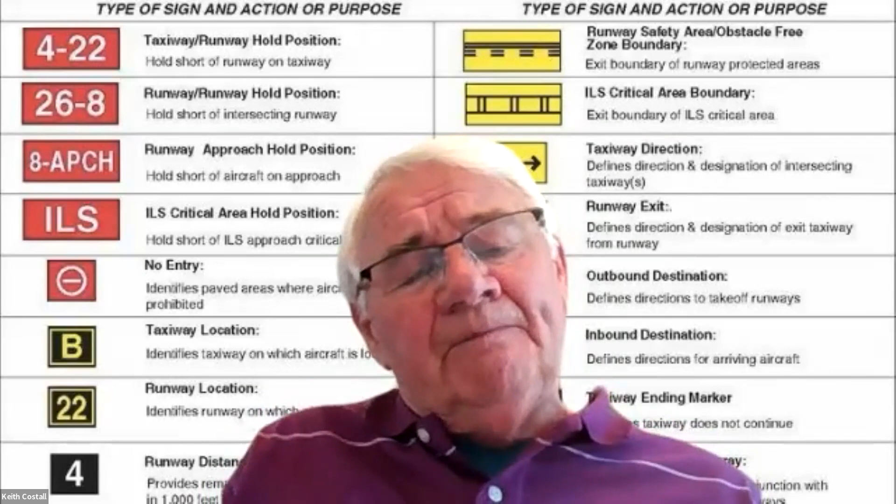Yeah, and if you have the tool, Robert, say you have your photometric tool, which we've spoken about, the MALMS photometric tool for example, then it's a measuring, it's a calibration tool, isn't it? So it needs to be calibrated periodically. So I would suggest that from an engineering viewpoint, if I've got any tool, I would need to, for example, recalibrate maybe the sensors once a year. Is that logical? Absolutely, yes. Okay, thank you.

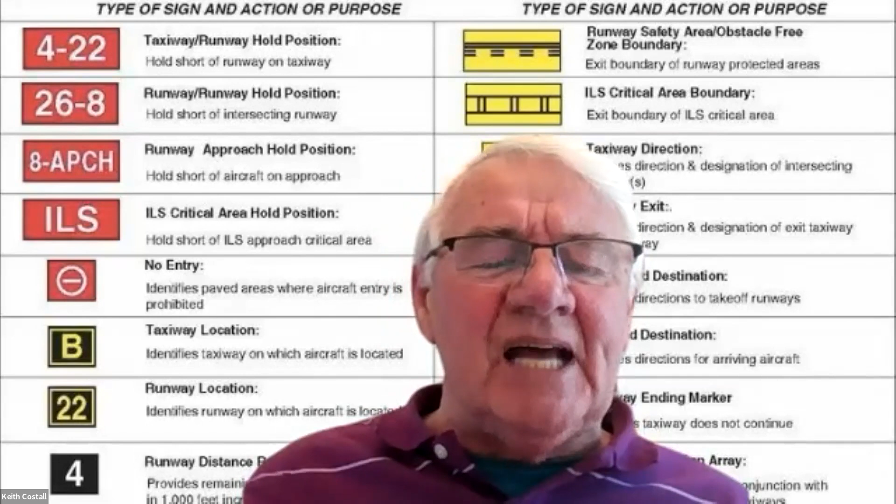Right, so can you look at the other questions, Keith? There is one, it says many CCRs disconnected by remote mode, others are okay. What is the problem? I think we need to, if they contact us directly, analyze the question a bit more, and find exactly what's happening, then we can give some guidance on that.

Another question is, if the lights are not every one at 60 meters, and is 62 or 64, what happens? What he's really saying is the spacing. If the spacing of lights, and we're talking, I think, runway edge lights, so some are 62 or 64. Well, the guidance for a precision runway is that they shall be no greater than 60 meters spacing, and they should be equally spaced, spacing no greater than 60 meters. So I think there's some issues associated with design there, I would suggest.

Keith, I would say that one of the things I've seen, I saw at an airfield last year, an installation where the lights were not parallel with each other. So they'd taken the 60 meter spacing, and they were not parallel with the light on the opposite side of the runway. And I think that was more dangerous because, of course, in low visibility conditions, you'll only see one light on one side.

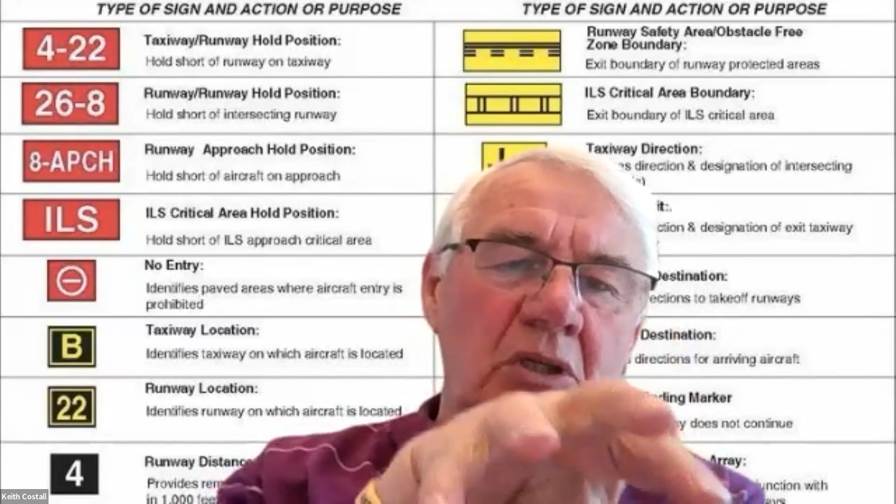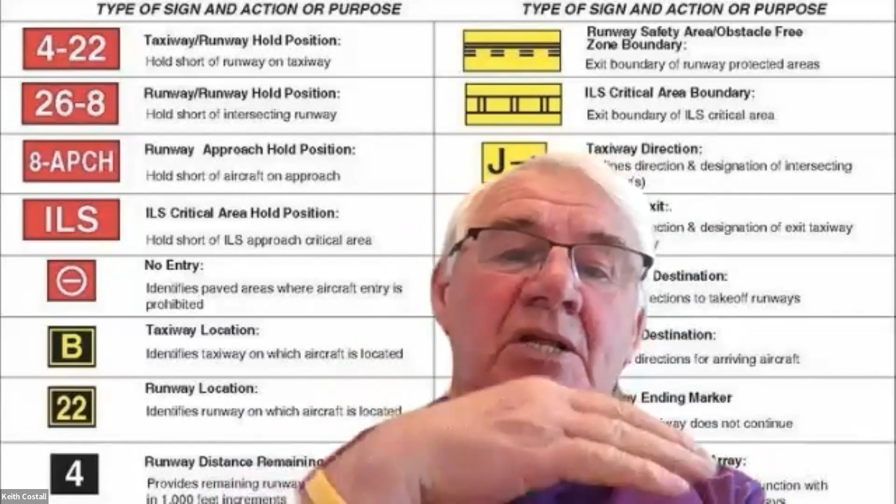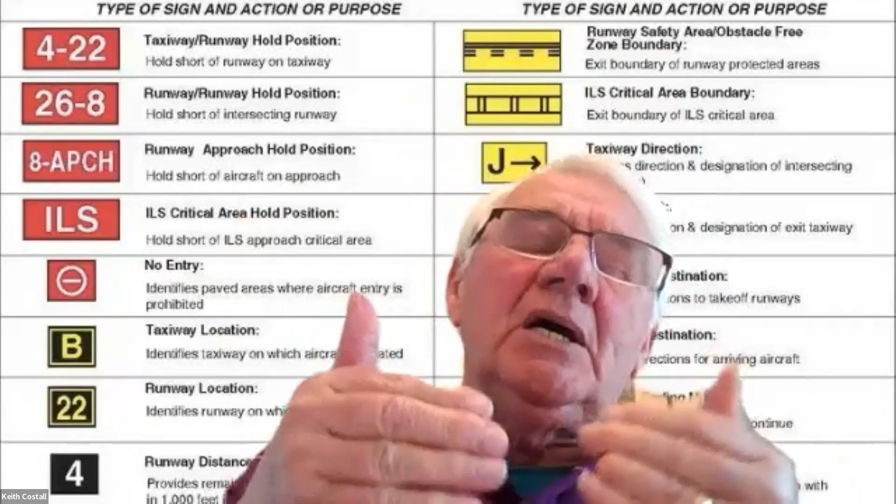I think also, Robert, and Tony will agree, because Tony, remember the early days of illuminated visual aids and those practical trials that Tony actually did or was involved with, the fact is that when we're looking at lighting systems, we're looking for uniformity. And it's when you have not got uniformity that the doubts come in. And if the doubts come in to a pilot who is traveling at 150, 200 kilometers an hour, that is an issue.

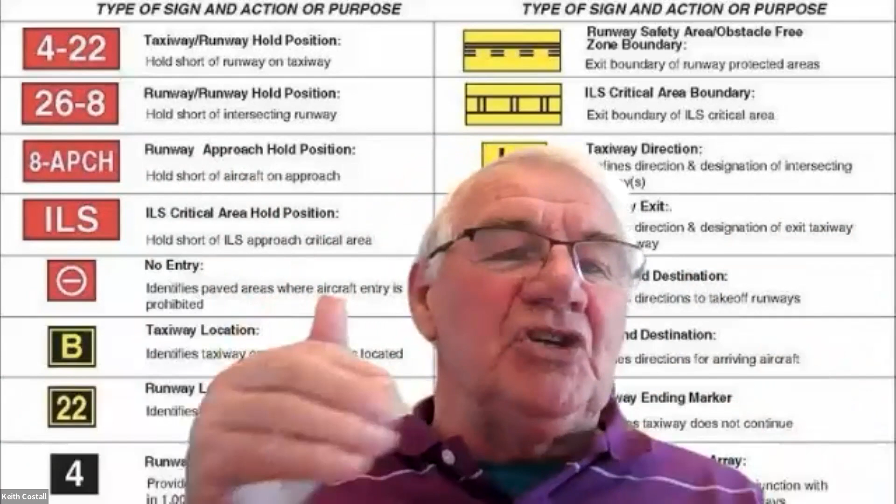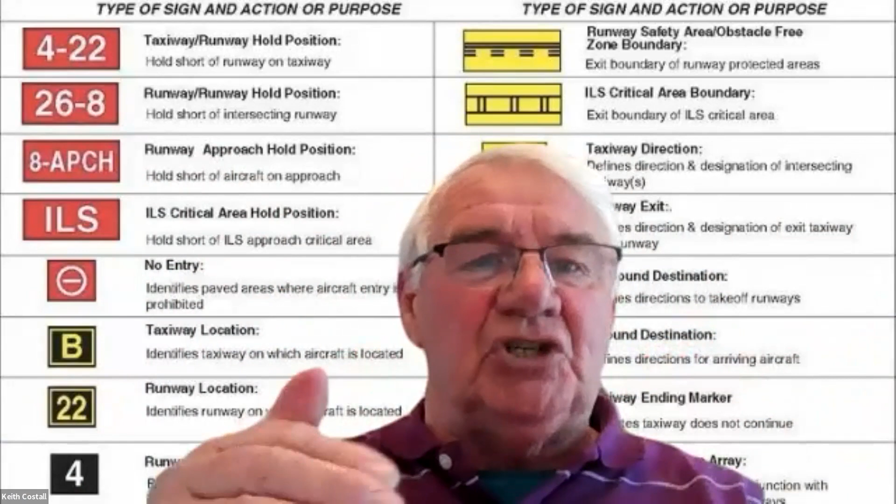So what you're talking about there, Robert, is uniformity. And I think, Tony, you will agree, uniformity was a key issue in all those practical trials. Right, yeah.

I think the best way of looking at this is to take the worst case, because the lighting is designed for the worst case. Frankly, if you were operating in clear visibility, just a night landing, if the lights on opposite sides of the runway aren't quite on the same line, I don't think any pilot will ever complain about it or even notice it. Where it will start to impinge is where what you actually see is only 2 or 3 lights, and if there's a significant difference in the longitudinal position of the two sides.

If you imagine on the right-hand side they're further up the runway, that can give you an impression that the aircraft is rolled slightly. Yes. So there's everything to be gained by getting it right. You potentially go into an uncharted minefield by not doing it. So why would you not take the trouble, at the design stage and at the maintenance and installation stage, to get it right?

Because having said that, there will be situations where the pattern isn't fully implemented. For example, where a taxiway comes into a runway, it may be that one of your runway light edge lights would have to be in the middle of the taxiway. Now you could perhaps put an inset center fitting there, but frankly, if there was just one light missing there, I don't think we're going to cause an accident. But these should be exceptions and should be looked at from the point of view of what does it mean operationally.

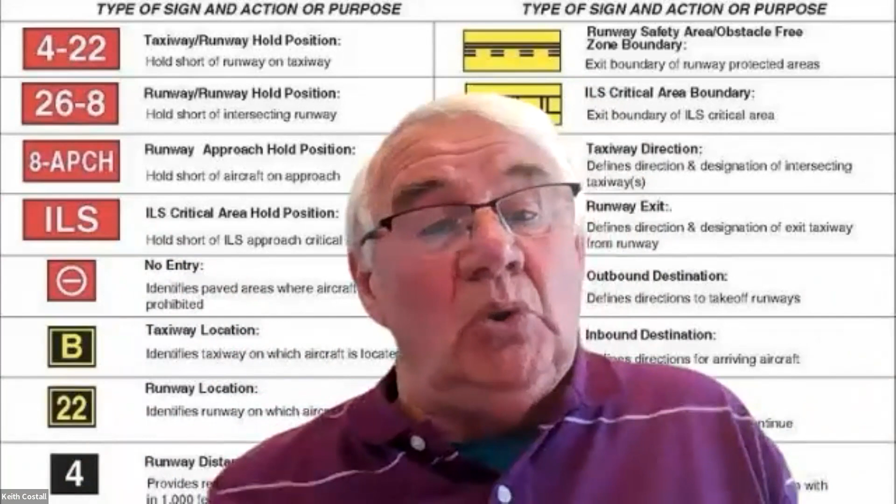Yes, yes, I totally agree with you. The fact is, what you were saying, Tony, certainly that roll factor in that low visibility scenario when fast decisions have to be made. Yeah. And that roll factor, if you have a displacement and not a uniform pattern, a displaced pattern, then that could result in an incident, as you say, with the pilot adjusting his roll based on his artificial horizon.

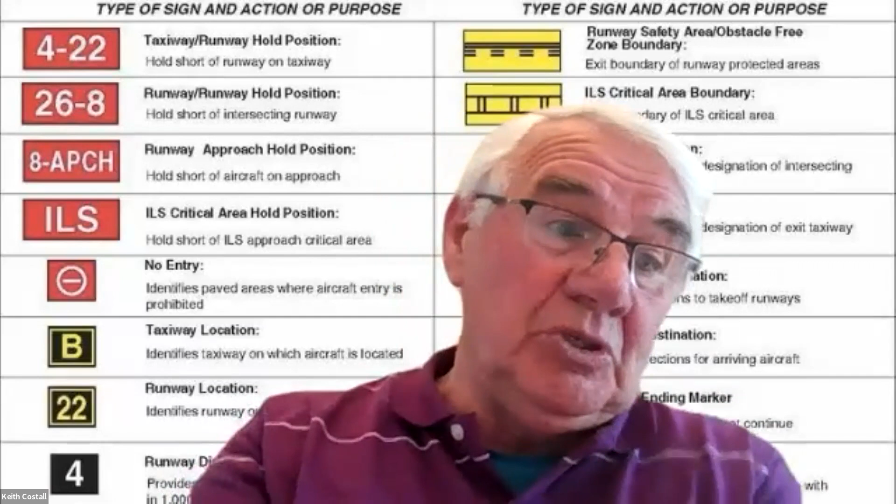I can't recall any accident report saying that something like this was present and caused the problem. That doesn't mean to say it never has. But my point is, you guard against the possibility by doing it according to the ICAO standards. Why put yourself into potential danger or any potential difference by not meeting those standards? Why do something different? That's where the hazard analysis comes in, and the risk factor. So is this all part of the safety case, or a safety analysis, which is part of the aerodrome manual? Yeah.